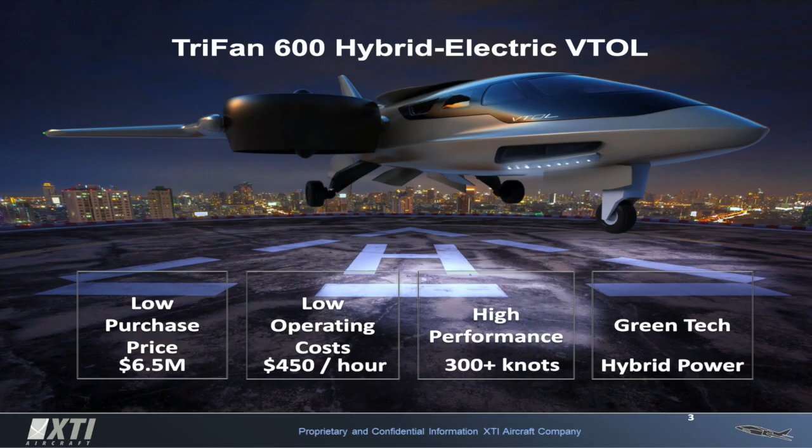And then 1,200 nautical miles if you do a conventional takeoff, because in a conventional takeoff the wings are doing a lot of the work early on, so it's weight limited in vertical mode. But you can get to 1,200 nautical miles with a conventional takeoff. You can still probably do a vertical landing if you fly that far, because you'll be light enough on the other end. Yes. So this opens up a tremendous amount of market space.

Originally it's designed, and still is designed, to address a typical business aircraft trip, which regardless of size or capability is typically about 800 kilometers or 500 miles. So it fits right in the heart of that. Normally a business aircraft is carrying maybe 3 or 4 people, so the sizing of it was to address specifically that market.

But what we're discovering is that in addition to that — and we have a huge amount of take-up already, with 81 reservations in place now, representing $500 million of future revenue — we also are seeing a lot of interest from folks who aren't in the airplane business right now, or certainly don't have a business jet.

Because of the economics of the aircraft, we're seeing people who want to set up a service point to point. All around the world, you could go city pair to city pair or two locations and match up a need with this aircraft. You'll see that you can fly people point to point very economically as compared to either a regional jet or even perhaps driving a car.

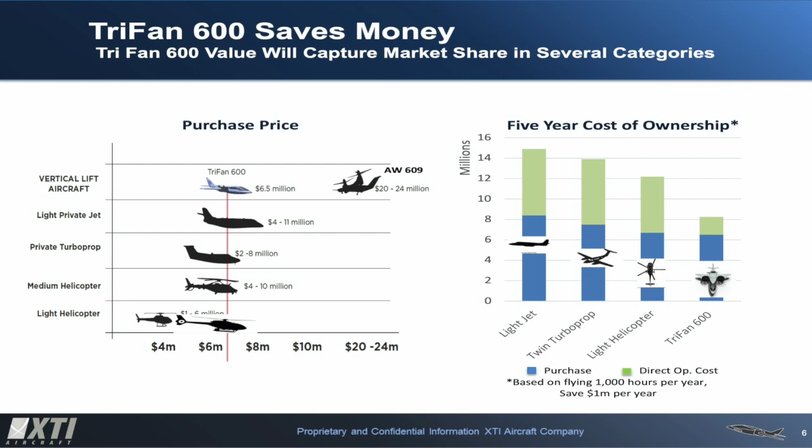You're talking $450 an hour all in? Yes, $450 an hour recurring maintenance costs. That includes all the amortized maintenance of the aircraft plus fuel. It doesn't include relatively fixed costs like a pilot, insurance, or the actual amortization of the price of the aircraft. But the aircraft is 6.5 million.

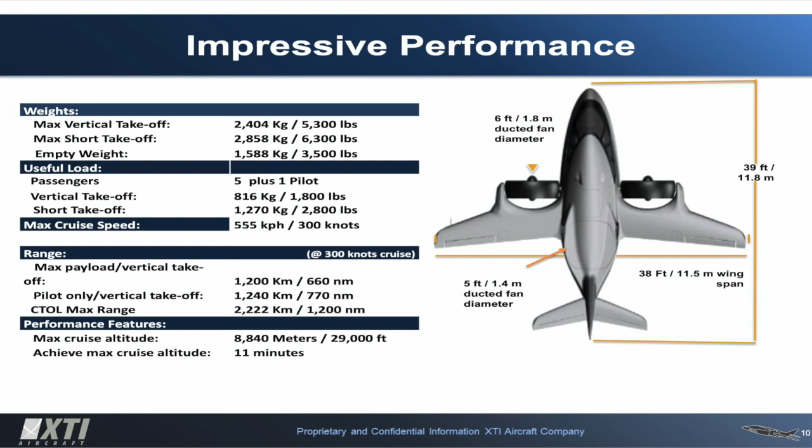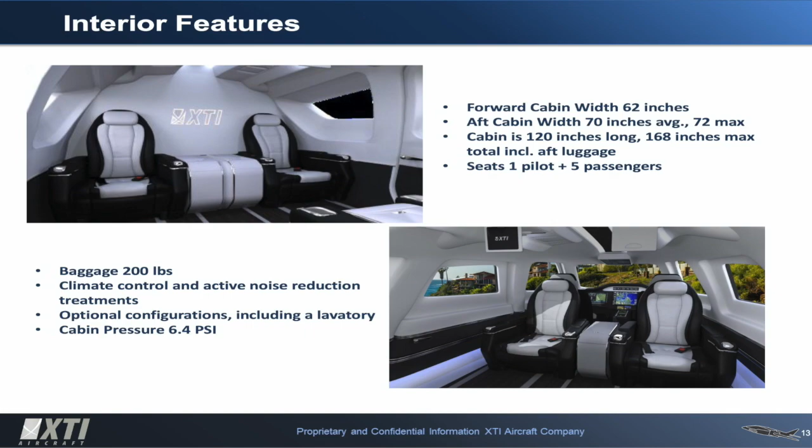We've already had a good amount of reaction in the market all around the world. Every continent we have some orders from. The point-to-point service aspect of this is huge. Then there's emergency medical services - it has a very large cabin and a fairly wide door, wide enough to fit in a stretcher and two attendants, so we're seeing interest from that market. Now we're hearing interest from military markets too. I really expect this to be a tremendous tool, used all over the world for things we probably can't even imagine right now.

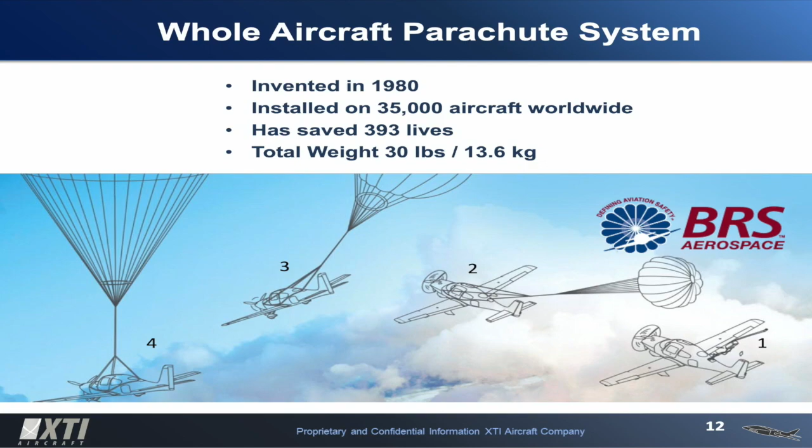So how is this going to disrupt the industry? Is it going to kill the helicopter? I hate to use the word kill in terms of a market, because there's some utility to helicopters that our aircraft can't do. If you need to hover, sit in one place, whether you're lifting a heavy load or certain things like that, helicopters are going to be needed still. But if you're needing to take off from one point and land at another and go far, go fast, why would you buy a helicopter when you can have a Trifan 600?

In fact, I've talked with people who have both. I talked with a business executive who has a helipad on top of her building, but she needs to fly to the airport so she can take a 600-mile trip in her Pilatus PC-12. She specifically told me, I'm placing an order for your aircraft, and when I get it, I'm getting rid of my helicopter and my turboprop because I don't need them. That's a small niche, I suppose, but a very good example of the utility of the airplane.

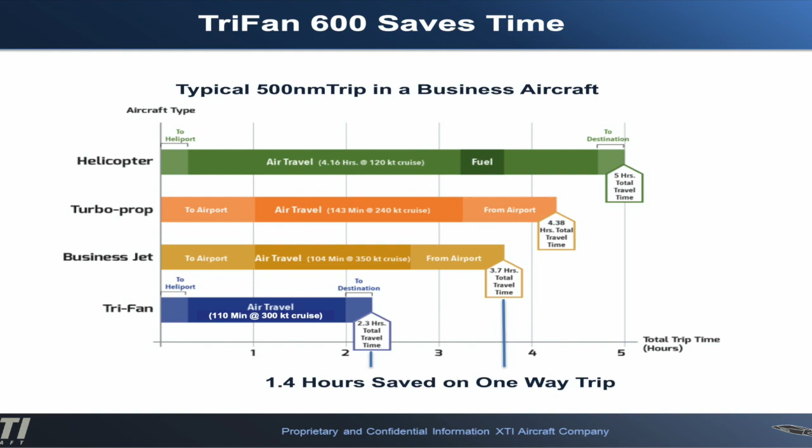We're also seeing interest from another niche market, and that is super yacht owners. This is almost like a little accessory for someone who has a super yacht. Now you've extended the range at which you can reach your yacht, and you can stay on board longer, or let it go away further while you catch up to it - it just provides lots of flexibility.

So where are you now stage-wise with the project, as far as creating the prototype and moving towards FAA and EASA certification? What's the timeline right now? The timeline from here to certification is 4 years. We'll be certified in, say, this time in 2024. We're trying to be realistic about it.

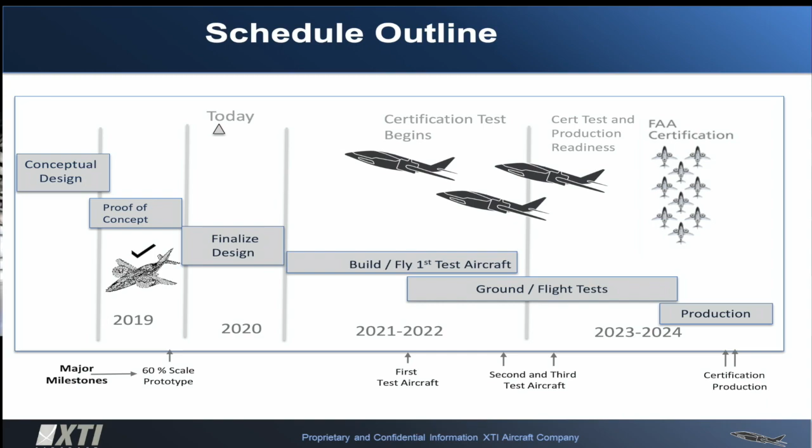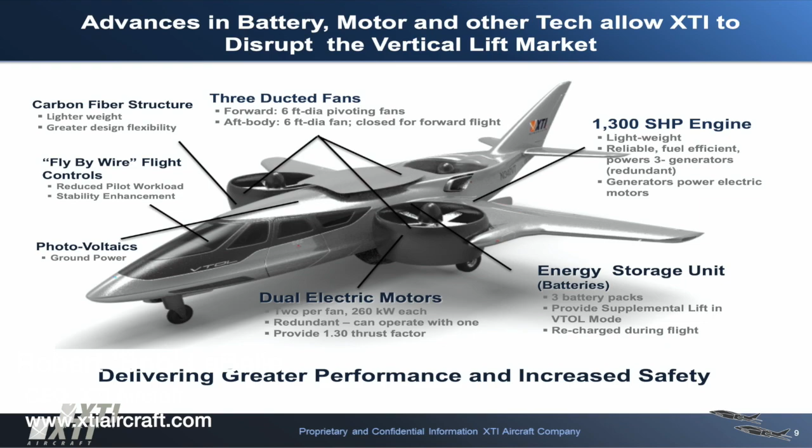In terms of where we are today, we've raised enough capital and spent enough capital to get through preliminary design. We have a pretty solid baseline for what we're going to do going forward, both in terms of the configuration and the actual individual elements of the schedule. We did build a 60% scale unmanned proof of concept prototype. It was battery powered only, it didn't have the gas engine, so no hybrid system. This was mainly to prove out some of the aerodynamics and also to look at the efficiency of the ducted fans. We discovered that the proprietary design we're using on the fans gives us a tremendous amount of efficiency, much higher than we even expected.

We've toyed with that, we've had no problems with it. It's worked well, but we really need to move into the full-scale effort, which is why we're currently raising a $25 million private placement which will launch us into that whole effort, get us a full-scale flying airplane within the next 20 months, and enter into a certification program with FAA.

So this is a hybrid electric and kerosene jet, the TriFan 600.

What are the chances of making it completely electric, or does that really depend on the development of batteries in the next few years? You're going to need a couple of step changes in energy density or battery power to ever consider getting significant range out of an aircraft.

Let me explain the hybrid electric system. You have a gas engine, like a turbo shaft engine, mated up with one or more generators. We're looking at a couple of generators to provide some redundancy. Then they provide electric power to electric motors in the hub of the fan. So instead of a mechanical interface and a mechanical system, you just have an electric motor spinning, which is much lighter, smaller, and more efficient than a mechanical system.

In takeoff mode, and this is why it's called hybrid, you have batteries which supplement that power, because the engine to the generator isn't enough power to lift it up vertically. We keep that reserved power smaller because in cruise, when the batteries are off, you're burning a lot less fuel but still have plenty of power to go forward on the wing. So in takeoff mode, the batteries supplement the power, giving plenty of power to the fans. You lift up, transition, go into cruise mode, the batteries turn off and get recharged—they're only depleted 10 to 15% anyway.